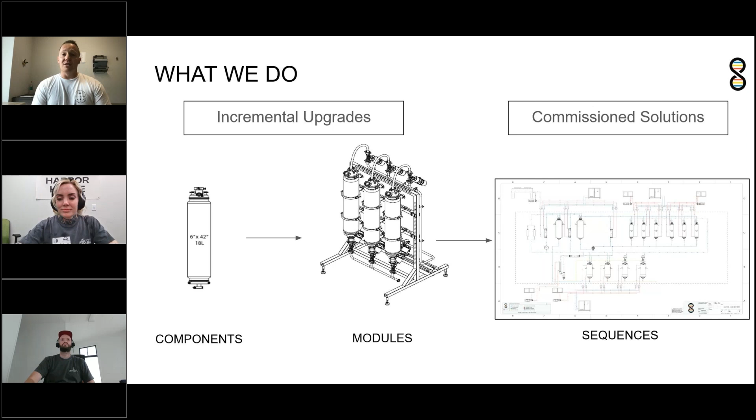But we also do full build outs as well.

How this all came about, funnily enough, is Murri put out a post, I think in 2018, or around then. The question posed to her Instagram audience was basically, of all these different turnkey systems, who's modifying their system after they get it? And to no surprise to us, 80+% of the respondents said, yeah, I'm modifying this thing as soon as it gets out of the box. That's not really a surprise to us.

Obviously you guys have specific market demands you're trying to meet. You've got different input biomass qualities, different SOPs. You're tinkering around trying to do things on the fly. So modifying the system wasn't a surprise. But what did come as a surprise is, why aren't these manufacturers making these modifications and building to design to tackle those specific things you need - tailoring the solution for what you need. Hence, Genome was born to try to tackle those things.

The short answer to why most manufacturers don't do this is because it's difficult, right? It's a lot easier to just make a system and say, this is the system, and if you want to tweak it, tweak it. Whereas we take a different approach where we're trying to understand what you're trying to accomplish and then systematically doing that in a safe and compliant way.

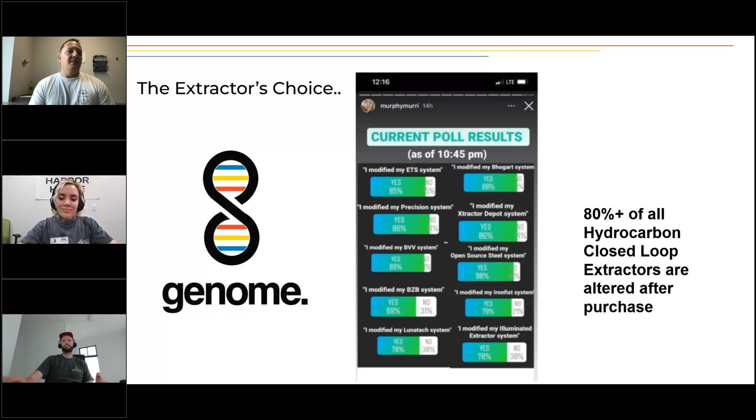Part of the way we do that, we do our in-house fabrication. We've got a team of engineers, chemists, and we're processors ourselves, so we understand the process in detail. But one of the key tools that really sets us apart is our Genome Technology Center. What makes this unique is that we're actually in the lab doing and making these tweaks on the fly, right beside our fabrication.

This allows us to provide three pillars of what we call our unique value proposition. The first is continual product and process development. Linden and his team are continually in the booth doing these processes, optimizing them, making them more streamlined. They're saying, man, we're having a lot of problems here, okay we need something for that, and then they're doing it on the fly. Then we're sharing that information and those learnings with our clients and with the community.

The other piece of this is we're also able to do custom feasibility testing and product demos. Some of you may have come to this facility and had either a private demo or conducted some feasibility testing, and we can run a whole bunch of different tests. An example would be, we're currently running CO2 crude extract into our controlled crystallization method. But we do a whole bunch of different feasibility testing, and we can also do mass balance calculations and really dial in the equipment and the process to your specific requirements.

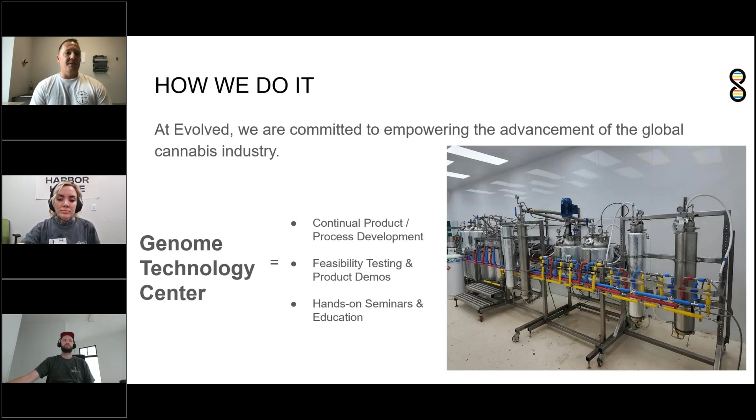First of all, we've got Linden. Linden is the CEO of Yellowstone Extraction. He's also the CTO of Genome Technologies, and his focus is optimizing solvent recovery times and, of course, developing the controlled crash technology and method.

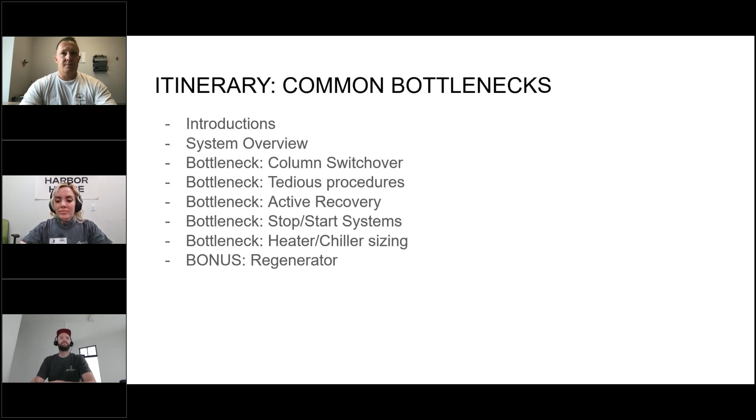So let's just jump into it. I think this is actually a little out of order, but the first thing I wanted to talk about—almost every system, when we go into a facility, this is extremely common—people are constantly disconnecting things and reconnecting, essentially jangling systems as they're trying to process.

This is the low-hanging fruit, one of the easiest to address. We've done studies showing that if it takes an extra minute to run a column because you have to disconnect nitrogen, reconnect vacuum, then reconnect clean solvent when you swap it over—on top of all the messing around with tri-clamps you already have to do to load and unload socks—you can add a significant amount of time to the extraction process, which accumulates to a significant amount of throughput.

You also have significant wear on components like quick connects, and it's not very conducive to training operators. As you become a director at your extraction facility training new staff, disconnecting and reconnecting hoses with these complicated processes is really easy to solve.

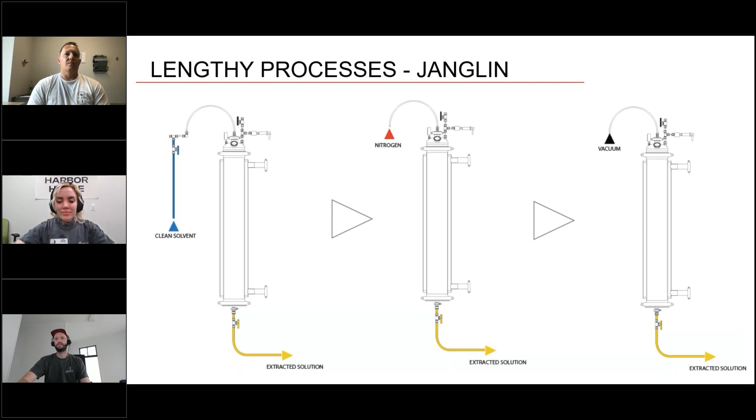The way we solve it is we have these manifolds. Actually, Murphy gave us the idea of shrink wrapping and color coding them, because when we were initially doing the seminars, people gave us feedback that it felt like they'd just walked into a spaceship. I think there's this curse where once you've run extraction for a while, it doesn't look like a spaceship anymore—you're following the flow paths. But when you bring a new person in, they're in the spaceship again.

Having it so they can make really easy decisions and minimize mistakes—like accidentally sending your miscella back through your nitrogen line—is avoidable if everything isn't just silver. If you're saving a minute per column, and running a column every 10 minutes, that's an extra 4 or 5 columns a day. It makes a huge difference, and then there's all the mistakes you avoid too.

Don't skip over the fact that color coding is doing double duty as insulation. You save time by insulating those lines, preventing frost and buildup that turns into slippery water mixing with weird weed particles that you end up having to clean later. The efficiency of that system works all the way downstream into your prep and cleanliness. Anytime you can double up like that—color coding, efficiency, and waterproofing all in one—it's a shortcut that saves time.

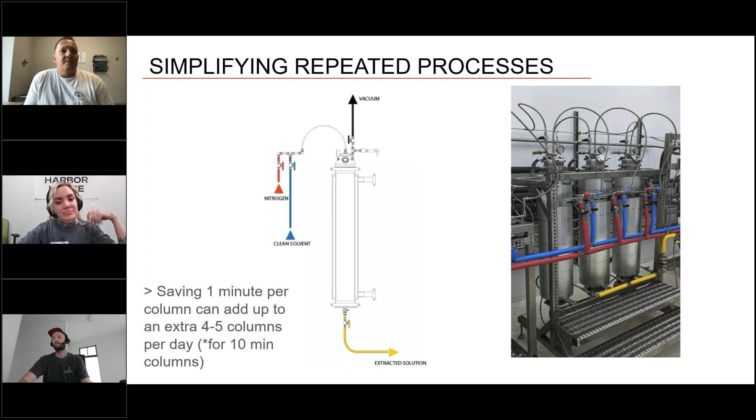Then the first bottleneck, another one that is relatively easy to solve and relatively inexpensive, is one we encounter a lot: if you're ever in a position where you are waiting for the column to be switched over. We found that to undo a 6-inch tri-clamp, pull the sock out, replace the sock, put it back on, and then vacuum it down takes most people about 5 to 10 minutes, depending on their skill set, how careful they're being, what tools they've got, and whatnot. And if you are waiting for that, then you need to buy more material columns.

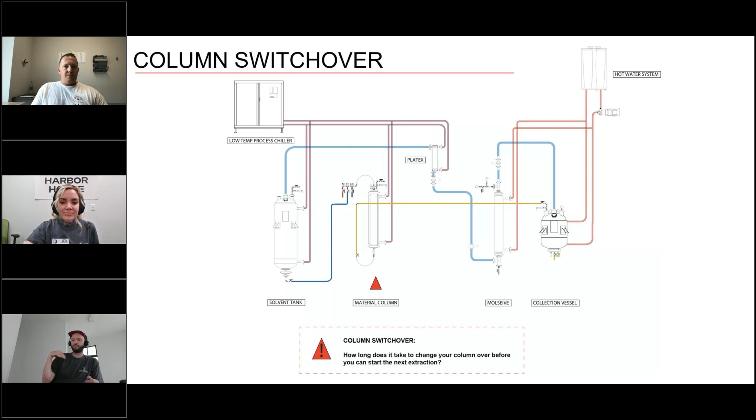This is another really easy problem to fix: if you're waiting, or if you don't have the time to do that, you just need more columns, right? We walk in and we see systems with 2 columns and stuff like that, and the really easy fix is to just purchase more columns so that you can be unloading one while you're loading another, while you are running another. So we always suggest a minimum of 3 so that you have ample time to be transitioning while one is running.

And it just puts you down this path as well, where your focus should be solvent recovery, and other parts of the process should be going as quickly as you can aggressively to try and solve this problem. You have anything on that, Murri?

I would also add that multiple columns also give you a much faster changeover at the end of a batch, because you can always have sections of the system that are quote dirty and quote clean with filtration in between them. So from a toll processing perspective, you can set up parts of your system where, say when you're running dry powdery weed, you're using different filters at the bottom of those columns, and those could always be set up in that area versus other columns where you're using less fine filtration because you're batching it to do mass CRC later.

And so you can use those physical locations as a way to support your staff, much like proper labeling and color coding. If this column always takes this type of filter, they're never going to accidentally put the wrong type of filter on it. You can geographically allocate space to specific processes, which is then going to make it a little bit easier for everyone to know what they're supposed to do.

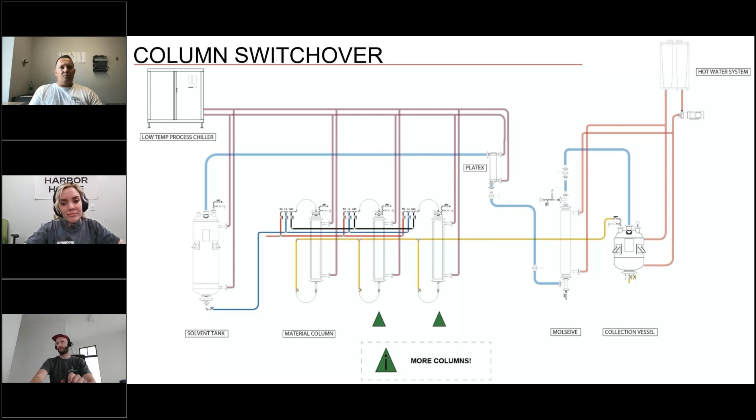And then you can start looking at the next part of the webinar that we're going to talk about, which is all to do with solvent recovery being the bottleneck. Because if solvent recovery is your bottleneck, you're in a really good place, provided it is fast enough.

So one thing I wanted to talk about here was the difference between active recovery and passive recovery, which has been a discussion in the industry for a long while, but I think is very important to understand why more and more people are going away from active recovery and towards passive recovery. And it's simply because it's faster and it uses less energy.

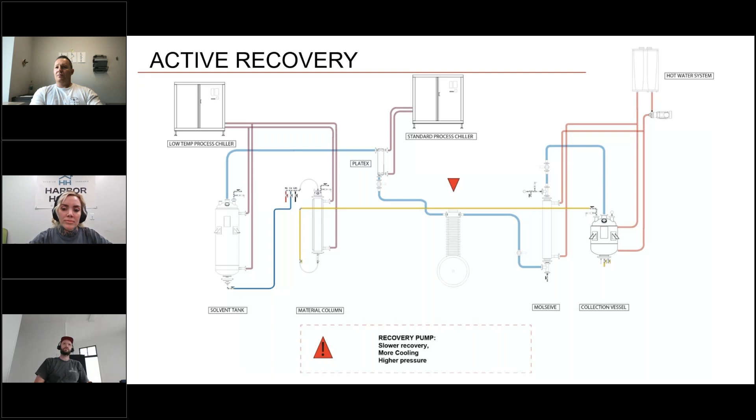Recovery pumps are convenient in the sense that you can turn it on and you can see kind of what's going to happen. They have that convenience item, but I really don't believe that it's worth the decrease in production throughput. So recovery pumps are slower to recover than passive systems that are designed properly. They require additional cooling, and also your system operates at a higher pressure.

And to dive into the weeds a little bit here, what's going on is that a recovery pump is essentially adding a lot of heat to the system, which you then have to reject. So the way that a recovery pump works is it's pulling gas out of the collection pot and compressing it, and then sending it into your solvent recovery. But throughout that process, you're adding an enormous amount of energy to the system that you then have to pull out with a chiller. And then, as you condense, you again have to cool that solvent down.

And so you're kind of fighting yourself in that regard, because you are already adding heat at this collection pot and you're already adding cold over here. The compressor pump is making that a lot more difficult to do. And it's also very difficult to scale up when you have a recovery pump, in the sense that all you can do is just buy another recovery pump and then you have two instead of one. You can't really scale it up very easily or very cost effectively.

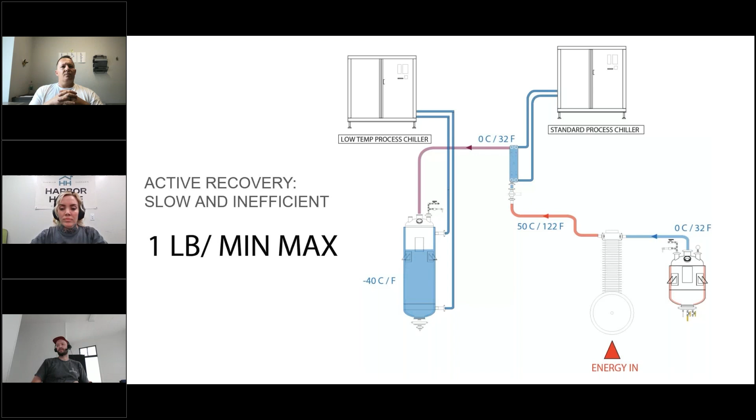And so what we suggest instead is a passive system. The difference is that you essentially pull out the recovery pump, you pull out the chiller that was in charge of removing all the heat the recovery pump was putting in, and all of a sudden, with the same heat exchangers, the same collection pots, we've seen almost 10x the increase in throughput by actually removing 60 grand worth of equipment out of the equation, and your solvent also comes back into your solvent recovery tank a lot faster.

So the way that it works is you heat up your butane and propane blend and boil it off, and then you passively condense it. So you use only the fact that the plate exchanger is cold enough to condense your solvent, and it will naturally condense and then pass back into your solvent tank already at your extraction temperature. And so it's faster, it requires less energy, and it's also more conducive to a continuous system.

I'm just curious, people that are watching, love to know which of you guys are already running active or passive. If you wanted to just put it into the questions, be cool to see kind of a breakdown. Yeah, passive, active, passive, baby. Nice. Once you go passive, I don't think you go back.

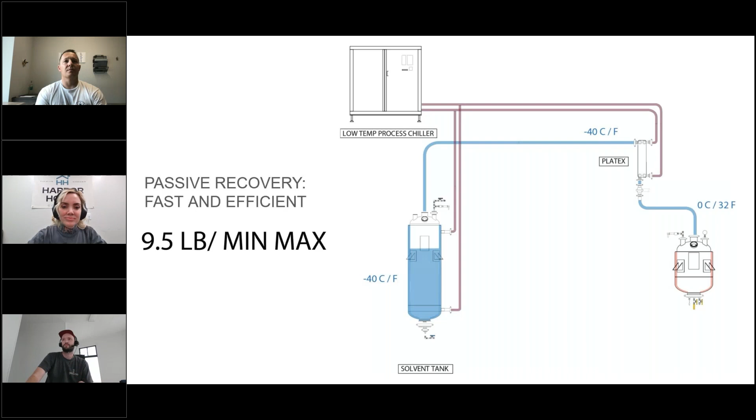With that, though, when people start running passive, they encounter essentially flow issues. It's kind of complicated sometimes to wrap your head around the head pressure within a system and how to get this thing to move. And with that, there's this concept of stop-start systems, as I call them. I'll run through what that is and then how we've addressed it.

So this is a system, you can imagine they had a recovery pump and they just switched to passive. The recovery pump used to sit here. What they do to get the solvent out of the solvent tank and pass it through the columns and into your collection pot is they add a nitrogen head pressure to the solvent tank. And that works pretty well.

It gets it moving, but the challenge is that if you've added 40 psi of nitrogen head pressure to your solvent tank in order to get that liquid solvent to drain out, go all the way through your column and then into your collection pot, you have 40 psi in here, which means that you can't be recovering solvent until you off-gas that nitrogen.

What that effectively means is that, okay, you have a really high solvent recovery rate when you bleed off that nitrogen and start your recovery, but that is a bit of a lie, because you're only recovering for 50% of the day, since half the time you're running extractions. So you have to stop the system and then start it. And then people buy second solvent tanks, and you end up running two different systems.

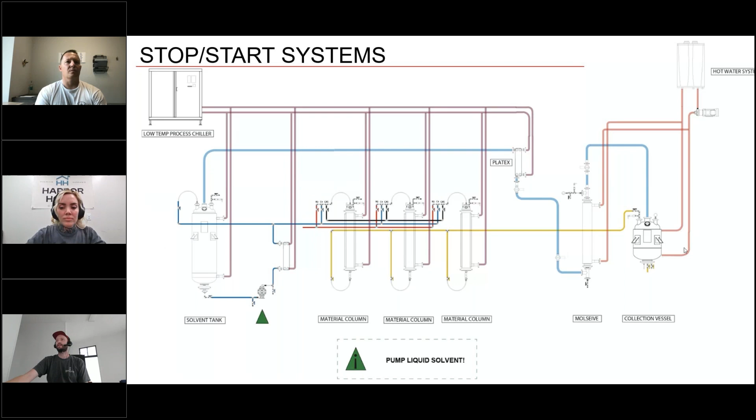So what we do instead is we use a liquid pump. We keep the pressure in the solvent tank really low, and we're pumping liquid out continuously and cooling it on the way through, and then pumping it into our collection vessel, which is actually at higher pressure than our solvent tank. And then with passive recovery, the gas travels extremely quickly back through the plate exchanger, condensing on the way so that it doesn't increase the head pressure in that solvent tank again.

And the loop is truly continuous, because as you're pumping this liquid solvent out, you're decreasing the pressure in your solvent tank and increasing the pressure in the collection pot. Then it rips back as a gas, condenses back as a liquid, and goes in a loop over and over again, as long as you can keep packing columns and have a way of topping up butane as you lose a little bit. It's a continuous, true closed loop system. We're a strong proponent of those.

And also with the liquid pump, you can pump it in a loop and cool your solvent really quickly. If you're waiting for your solvent to cool down, which is another common bottleneck, that definitely slows you down. So you can pump it in a loop, or you can just pump it through a plate exchanger on the way to your extraction, and that'll speed you up a lot there too.

Murphy, do you have anything on stop-start systems, or maybe I'll go on to heater and chiller sizing? I mean, I think the only thing I would add is that really, there's kind of a time and place for everything. So I love a continuous flow for extraction. And what I'll usually do is batch the extraction into a big holding tank. And then I do a stop-start for my filtration, because I like to take a lot of fractions and I use more of a chromatography method for my filtration.

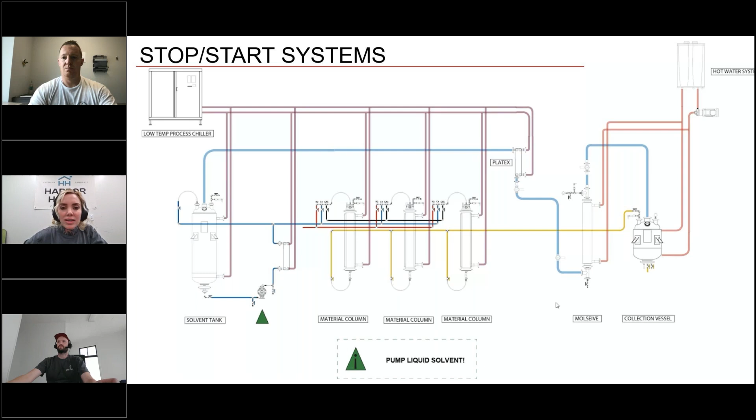If you've got the team to get in there and run continuously, you should have the fastest extraction possible and not run two shifts, cut down that labor. Everybody's business is going to be a little bit different. And so thinking about your needs alongside these options, it's not really one is better or worse. It's some are better or worse for specific scenarios and specific applications, thinking about how you want to use it and how your workflow really needs to be.

Some of you guys are going to be owner operators, and so you're going to interrupt the run to go take a phone call. And some of you have staff and you're going to make them leave their cell phone 150 feet away up front in their locker, and they're not taking phone calls. And those two people need different flexibility in their system probably.

Yeah, absolutely. I'm definitely taking the approach that everybody's trying to industrialize, which is maybe a little bit more my mindset in some cases. But yeah, start-stop systems is how everybody learned, and they have a place. But as you scale up, it's got to be like a factory mode. Yeah, and you've got to scale up your staff to match. Yeah. You got to change the way you work.

So with that, a few people in the questions have been addressing this as well. You're limited by your chiller, but I kind of breezed past this a little bit, you are also limited by your heating capacity. The reason I breezed past it a little bit is because hot water is a very achievable

problem to solve. Like we use these on-demand hot water heaters a lot, which I'll get to in a second, but you can very easily, especially if you have natural gas on site, have more hot water than you'll ever need and circulate it really quickly. So if you're dealing with tiny little recirculating heaters and stuff like that, and your heating is your bottleneck, like if you feel the outside of your collection pot and it's ever cold, then great news.

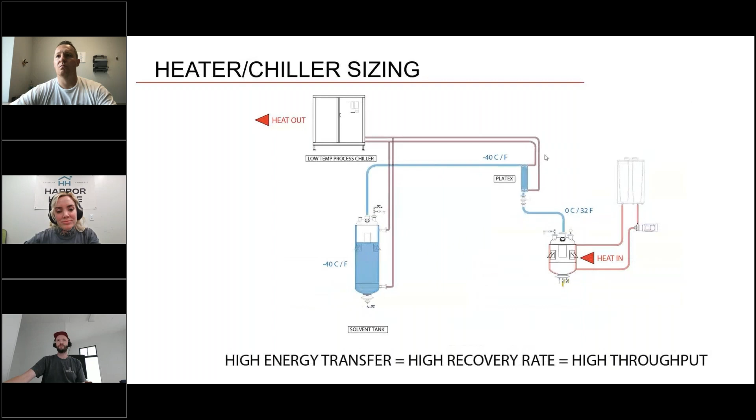But I just wanted to go through some charts. With solvent recovery, the size of your heater and chiller is directly correlated to how fast you can recover solvent, which is directly associated with how much solvent you can recover, how much biomass you can run and whatnot. But I thought that this was an interesting way of looking at it, which is if you have 5 kilowatts of heating or cooling versus 20 kilowatts, there's your 3x or more immediately, right? Just on having the right size heating and cooling.

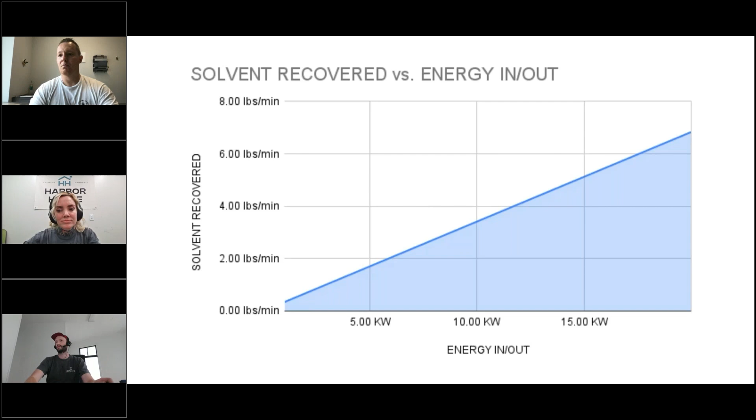And so identifying that and getting an idea of how fast your solvent recovery is going and why is it stalled? Is it because you can't reject the heat, or is it because you can't heat up your collection pot enough? That is very important to identify. And then at a 3-to-1 rinse ratio, 5 kilowatts of heating and cooling versus 20 kilowatts is the difference between running like 25 pounds a day versus running like 125 pounds a day. It has a huge impact.

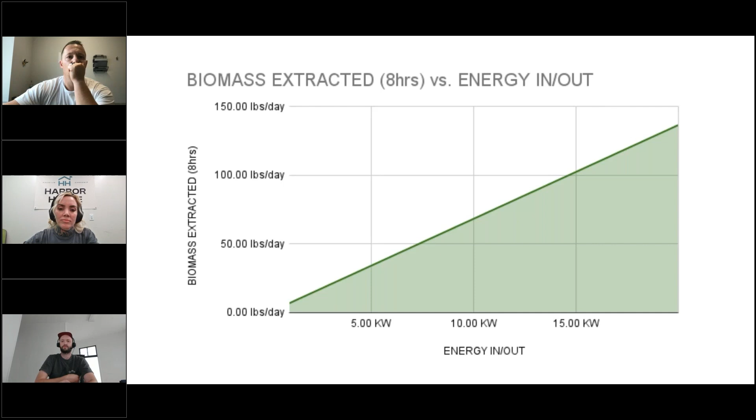And so, yes, chillers are expensive, but you can calculate it out, and it's almost always worth it. And this is why, when we're suggesting chillers to people, we always try and future-proof it. Like if somebody's maybe going to make these upgrades in a few years, it's often cost-effective to buy a larger chiller up front.

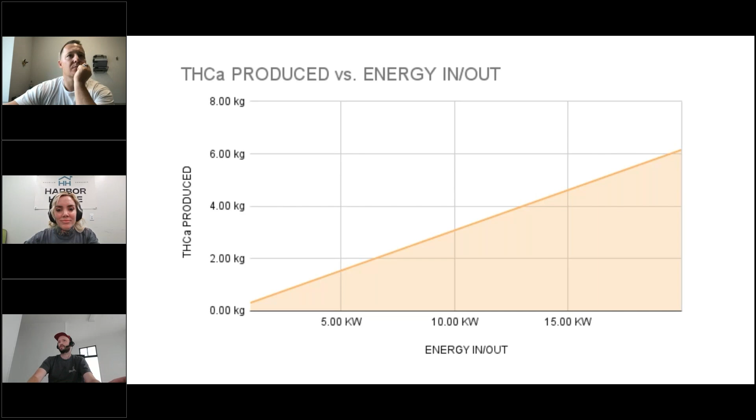And if you look at it in regards to THCA produced, you'll notice these are all just the same graphs. I just calculated what they were all equal to. But if you can produce an extra like 5 kilos a day of THCA, how many kilos of THCA is in a chiller? And then this is just to give people an idea of what is a kilowatt. I thought this would maybe help jog people a little bit.

Actually, to flip ahead one slide, a lot of people have these little circulators, and I think Huber makes really good equipment and stuff like that. I'm not trying to knock them, but it's just the right tool for the right job. They're underpowered, right? And if you're heating your collection pot with something that's 2 kilowatts, you have less than a stovetop burner in charge of your industrial process.

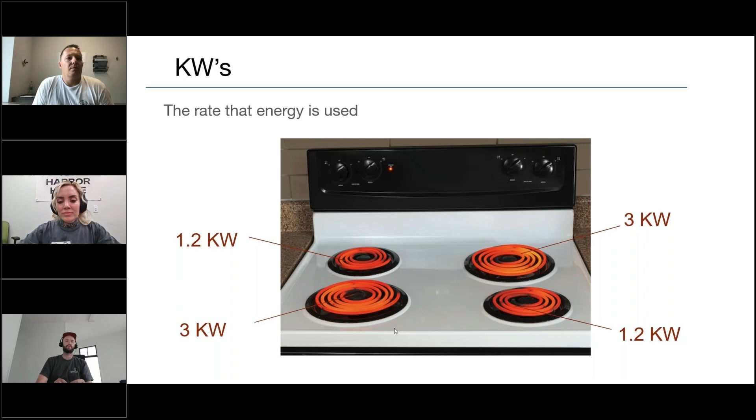And so if you can go towards something like an on-demand hot water heater, which is one Home Depot trip away, you can significantly increase your throughput. Mind you, you do need more than just the system. You need a circulation system and some filters and stuff like that to get it all working, but it's relatively low-hanging fruit.

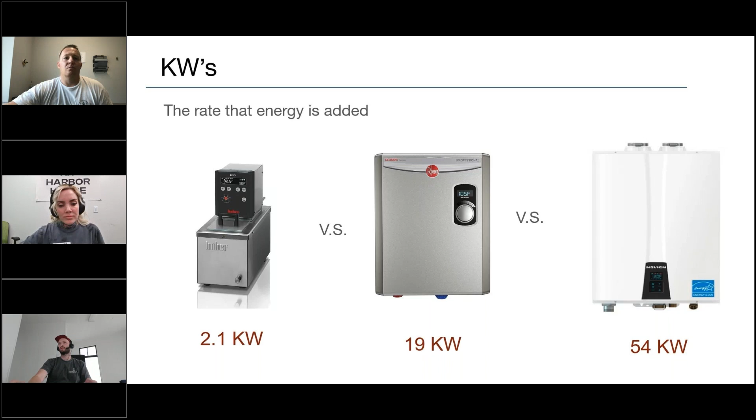And then just to give a look at these chillers too, another thing we encounter a lot is like, hey, can I use this chest freezer to cool my solvent or something? And the answer is you shouldn't do that, because first of all, it's not HazLoc. Second of all, the chilling capacity of these industrial chillers makes a world of difference, and they're not significantly more expensive than some of these mid-range chillers that are really geared towards chemistry experimentation.

In my opinion, they have really tight tolerances on their output temperatures. There's all sorts of automations that you can do, and integrating with other equipment. But we don't really need that here. That's not really the goal. The goal, in my opinion, is to reject as much heat and condense as much solvent as you possibly can, in which case we suggest going with a more industrial solution.

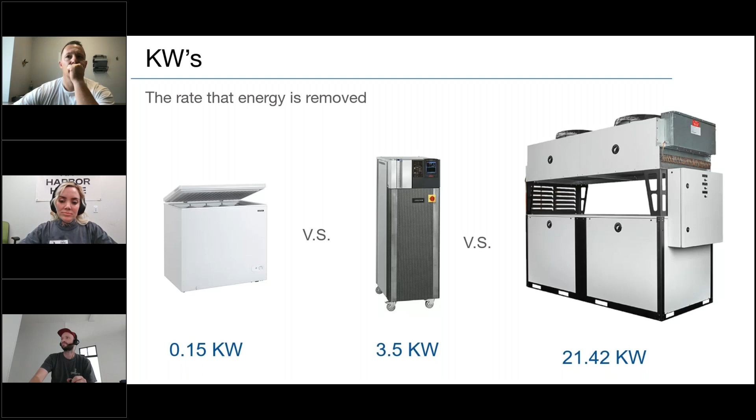Yeah, we're making pretty good time here. We're already on the Regenerator, so we'll definitely have some time to answer some questions here.

Sean is asking what pump we use. Yeah, we use a custom-built liquid diaphragm pump. We can address that. What data is this chart based on?

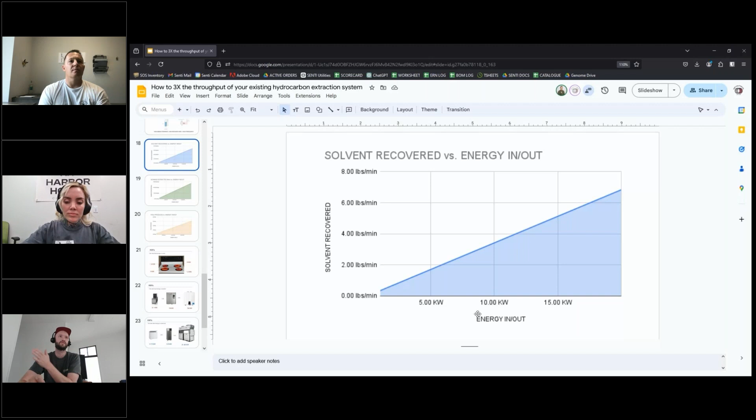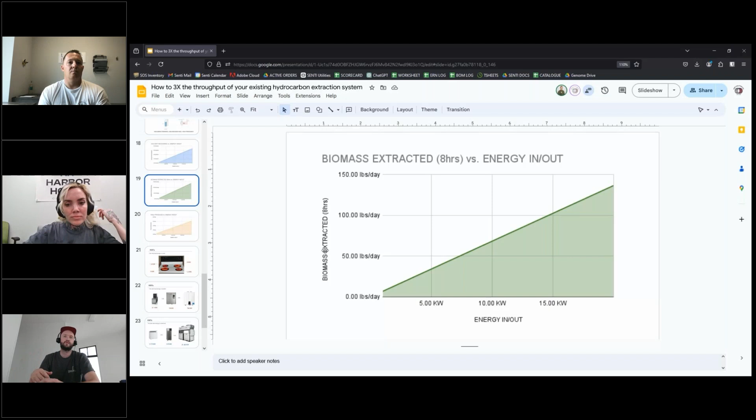Yeah, so just to walk through how I came to those numbers, before we go back to the Regenerator, let's go through these charts. What I'm talking about here is kilowatts versus solvent recovered. We use a number called enthalpy of vaporization—there's a very defined number for how much energy it takes to boil off a certain amount of butane. And then this chart, how much biomass you're extracting, is calculated assuming a 3-to-1 rinse ratio. We use a 3-to-1 or a 5-to-1 rinse ratio. And how much THCA that produced was with like a 10% yielding biomass. I just kept super standard numbers, but just to give you an idea of the impact of properly sizing your heating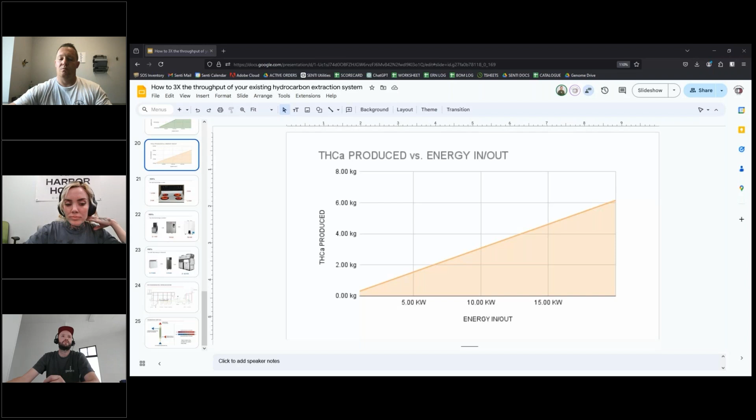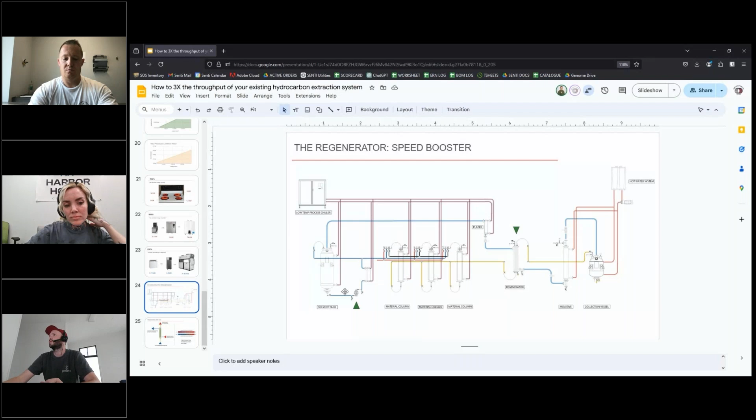So with that, I wanted to talk about regenerators, because they're one of my favorite pieces of equipment, because essentially you operate them for free. The best way to explain it is it's a heat exchanger that recovers your cold—the cold from your processes—and uses it to condense the solvent you're trying to recover. So your extraction, you're typically cooling your solvent down to -40, and sending it through these columns. By the time it comes out, it's still at -40, and you're sending it into your hot collection pot, which then has to heat it back up and then boil it.

So what we do with the Regenerator is we cool a heat exchanger down, which condenses the butane that we're boiling off. And it's crazy, because with butane it's an additional like 36% recovery—another third or more of what you're already recovering, you can get for free by putting a heat exchanger in the right place.

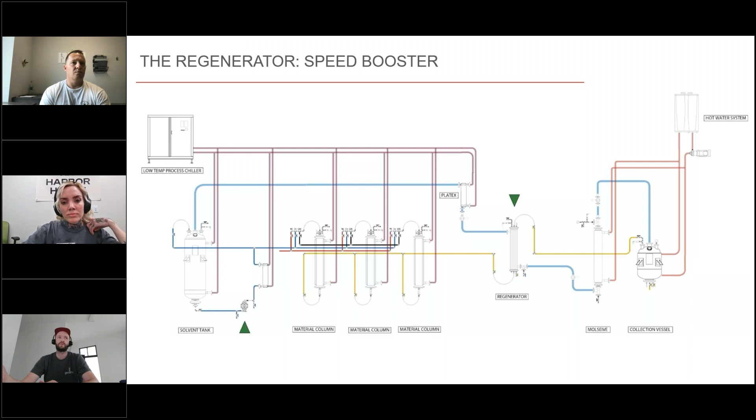What you're doing is using the cold butane from extraction to cool your heat exchanger down, and then condensing the gas on the outside of that heat exchanger. This helps your heater do less work, your chiller do less work, and you get a whole extra third of your production for free just by putting that heat exchanger in the right place.

So that's often the first thing we do at people's facilities—we just toss a heat exchanger in, and all of a sudden there's this effect too where your collection pot's at a nice rolling boil, and then you shoot in cold butane and it goes completely flat.

And that no longer happens, because at the same time as you're condensing that butane, you're actually preheating your cold butane from extraction. So your butane solution with your resin in it is now right at the point where it's ready to boil by the time it enters that collection pot. So you get a huge speed boost both on the evaporation side and on the condensation side, which is kind of fun.

I'm just reading some answers. Oh wow, people are answering this as we go. We run the Unistat 3.5. I'm trying to answer everybody who's popping up with specific stuff as you're chatting.

Yeah, so let's start just answering these questions as they come in because we got the time. How do we run the Unistat 3.5 kilowatt chiller? How can we determine whether or not to upgrade, or know the fact that our chiller is sufficient?

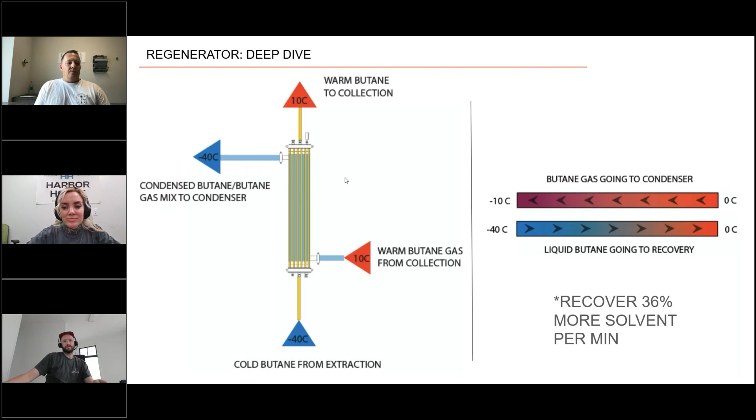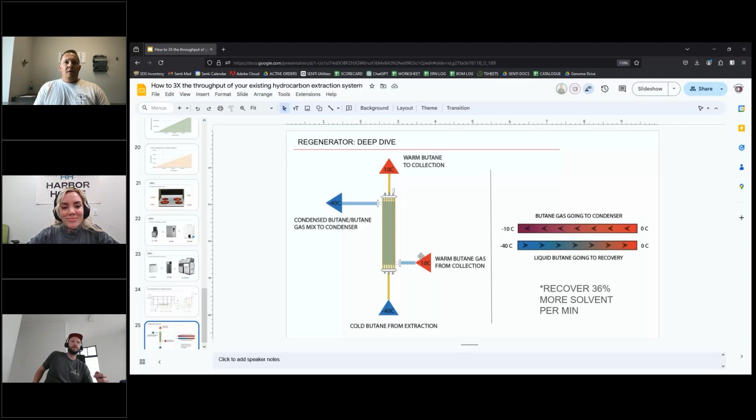A few people are asking about temperature fluctuations and limitations with hot water systems. The real secret there is to have good flow rate. You want like 5 to 10 GPM, and you'll have much more consistent heating. If you're seeing spikes where it's cooling, it's not necessarily that your heater can't keep up, it's that you're flowing liquid just a trickle through there, so it gets into the jacket, cools down, and then it's not doing anything. You can have a super high kilowatt heater that doesn't do anything if you're not circulating fluid through it, so we can definitely help size that out properly. You need enough flow.

If you're running a hot water recirculator and haven't drained and replaced that water in the last year, it's time. The buildup inside the fittings and hoses is foul, and that will limit your flow rate insanely. The more valves you put on your system, make sure they're full bore - any valves on your fluid flow line can extremely limit the flow rate. If you're going from a 5/8 line down to a 1/4 inch valve and then back into the vessel, you're giving yourself bubbles and bottlenecks that are no good. Sometimes simple changes to that application can go a long way.

I just saw an interesting one here, which we didn't touch on during active recovery - Thomas is asking why you think 70/30 over straight butane is beneficial for throughput. That's super interesting. Propane came in partially early on. We know now, I think, that propane is used to pull more terpenes and produce a nicer extract.

Initially, a lot of people were using propane because it created a higher vapor pressure at the inlet of your pump, so you could pump it out of your collection pot faster, where butane is a little bit sluggish. Doesn't really matter with passive recovery, in my opinion, you just increase your temperature, but that's why it was beneficial for recovery, as it works better with a pump.

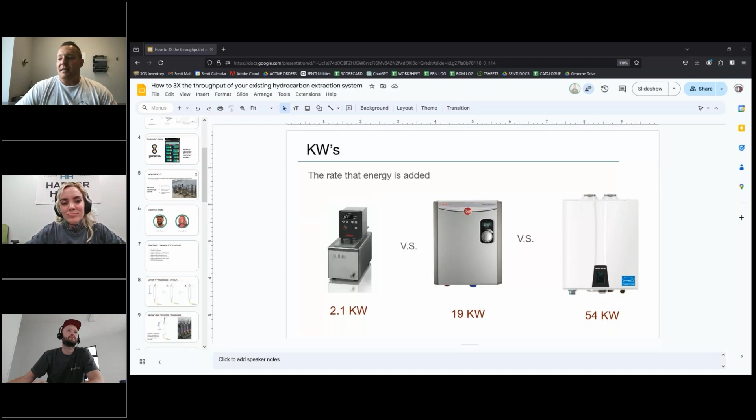I don't know, something - I will say I did finally get to run a system with liquid nitrogen on demand for cooling, and I always said it seems too expensive to be worth it. We turned it on five minutes before we ran and it was ready. I love my big chiller, but oh boy, if you can afford it, I've changed my mind.

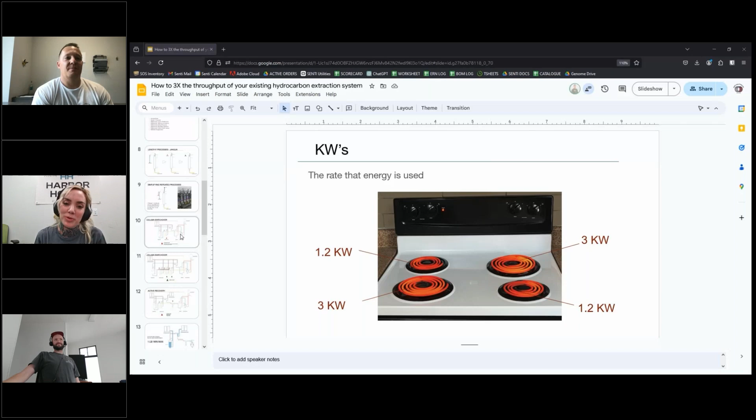Can you freeze butane with liquid nitrogen though? Potentially, but you regulate that - it's highly regulated. The control panel outside the room, you set those parameters in advance, so the fact that it's frozen out there, you are tightly controlling it before it ever enters the booth. I questioned it, but it was actually great.